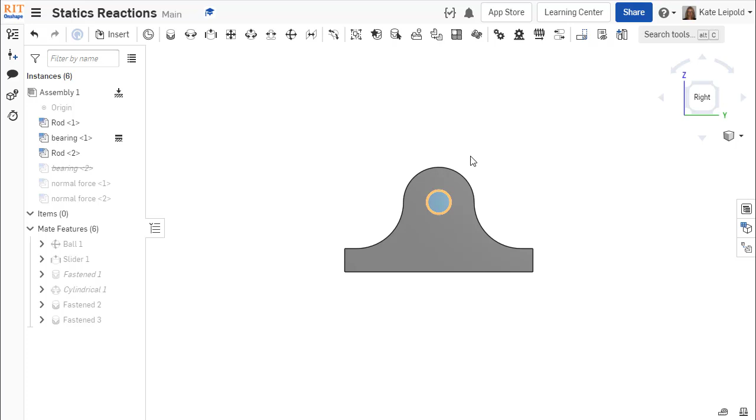We're getting into the 3D reactions and statics. So this might look familiar as a pin connection. The blue part here would represent the pin, and we might have a body associated with it. And in 2D, we would have normal forces acting in both the x and the y direction. And now we're moving to 3D.

Okay. So in 3D, if that pin support is sufficiently narrow, it really only acts the same way as the pin connection. It really just exerts a vertical force and a horizontal force. And we'll try to demonstrate some of the motion that could be acceptable through a very skinny bearing or

pin selection here. Okay. So we can translate through that bearing, but it also, if it's thin enough, does not stop any rotation. We really have just an x and a y force if z is along the translational axis here. Okay. The way it's shown here in Onshape is an x-axis, but we have two forces stopping translation.

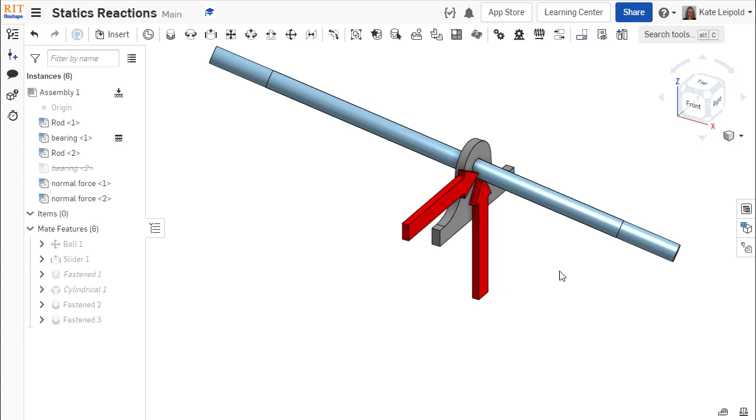Okay. Quite often in the real world, when you see a situation like this, you do see two bearings used together in conjunction. And when you have those two bearings, you'll end up stopping the rotation.

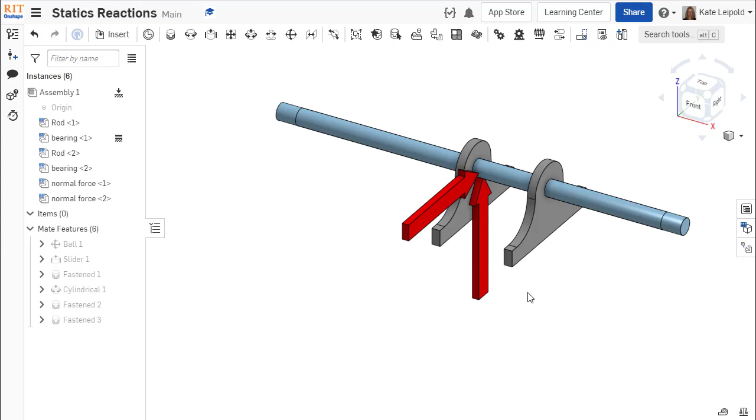There we go. We will still have translation, and actually this axle can still rotate as well. So the two bearings used together does end up stopping rotation. Here you see the two bearings acting together, each lifting up on the axle and each holding it into the center. Again, there's no stopping of translation, but ultimately the combination of these forces do cause restriction in rotation.

Now, both of these are shown as going upwards, but really they're going to act as a couple. So let's just show that a little differently. Here I've shown forces in opposite directions. Okay? They're not necessarily equal and opposite because we do have the tendency to stop translation as well.

But hopefully we give you the sense here that these two bearings acting together will stop the rotation. And this is typically what you'll see in a physical setup. However, sometimes we can replace the effect of two bearings, which stop the rotation, with a single bearing.

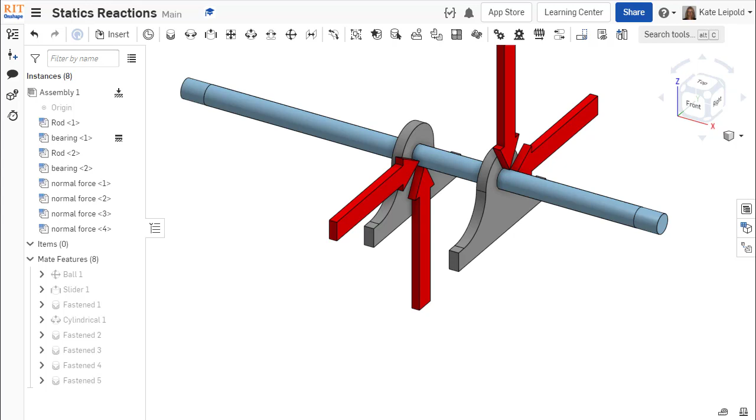Occasionally, when we cannot have two bearings to support a rod, you can support it with a single bearing. And a single journal bearing does have to support the rotation on its own. So it kind of acts like two, where the forces really are going to be more localized on the endpoints, but we don't show it that way.

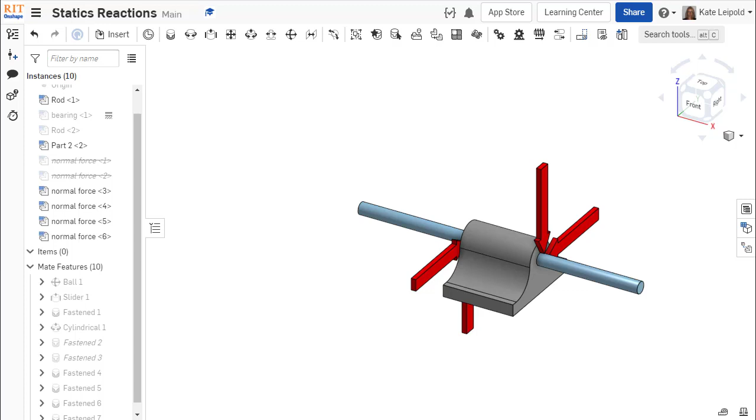Okay? So while it kind of acts like two bearings with forces at either end, and one end's going to hold it down and the other end's going to push it back up, we don't show the forces that way because we're not always given the width of the bearing. When we have a large bearing and it is supporting a rod on its own, that is when we include the reaction moments.

So when a bearing holds a rod on its own with no help from another bearing, when it's not used in a pair, it stops the rod from sliding side to side, it stops it from going up and down, but it also stops it from rotating around what this orientation looks like in x-axis. And it also stops it from rotating around, again, an observed z-axis in this location.

It does not prevent rotation around y. And for a journal bearing, it does not prevent translation along y. A thrust bearing would be used to stop translation along y.

So another hint as to whether you should be using moment reactions or not is count the number of unknowns. If using those moment reactions gives you more than 6 unknowns, then you're in a situation where you probably really shouldn't be using those moment reactions.

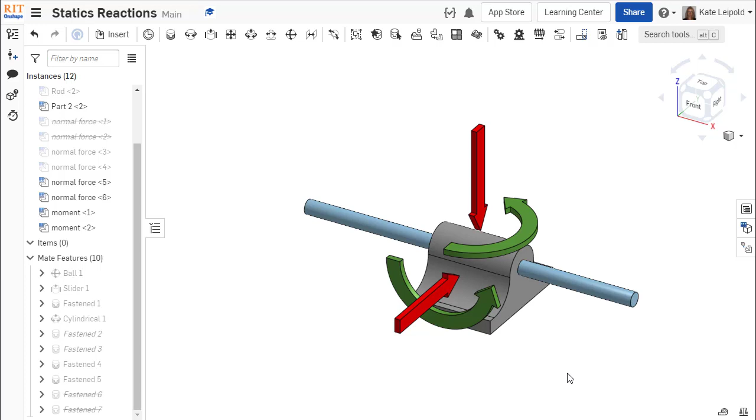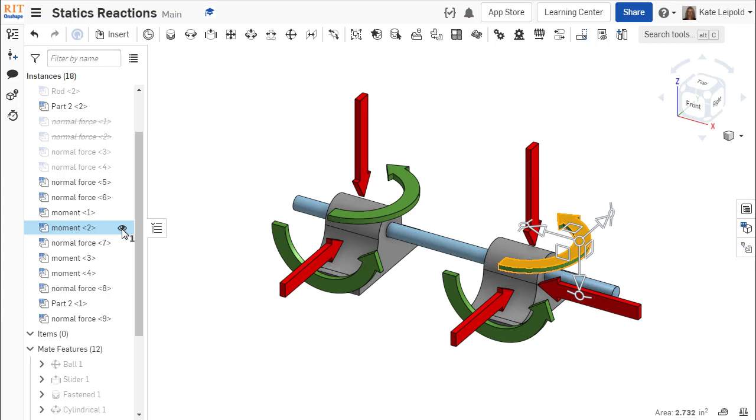And so we assume that the moment reactions are negligible given the fact that there are normal forces that can stop that rotation. So the pair of normal forces between the 2 different bearings, that'll stop the rotation better than an internal reaction moment. So with 2 properly aligned bearings, 1 journal, 1 thrust, we have 5 unknowns, which means this can still rotate, but typically in those problems there will be another reaction to consider.